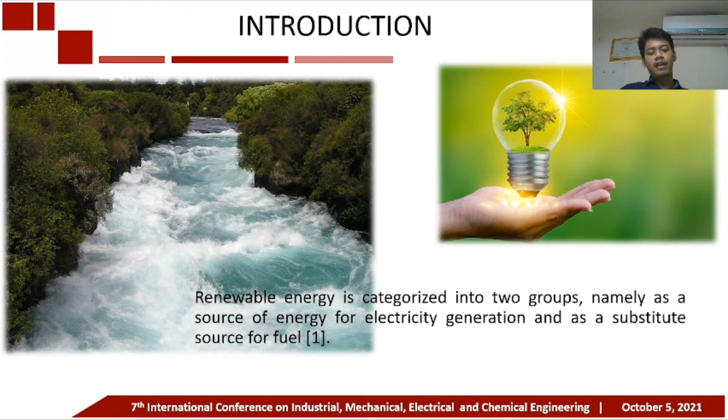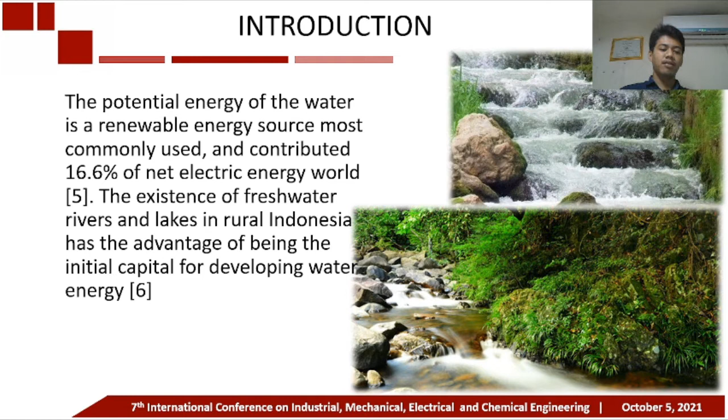Renewable energy is categorized into two groups, namely as a source of energy for electricity generation and a substitute source for fuel. The potential energy of water is the renewable energy source most commonly used and contributed 16.6% of net electric energy in the world. The existence of freshwater rivers and lakes in rural Indonesia has the advantage of being initial capital for developing water energy. One of the micro-hydro power plants is the gravitational water vortex power plant (GWVPP).

This type of turbine technology is a new turbine technology, which is expected to compete with conventional systems for low head and low flow applications. This turbine was first developed by Franz Zotlöterer in 2006.

The system produces a free surface flow which is created in an open space or basin with a hole located at the bottom of the basin so as to produce a vortex flow. The first installation was carried out by Zotlöterer, which produced 10 kilowatts of power in the Obergrafendorf River, Austria, in 2006.

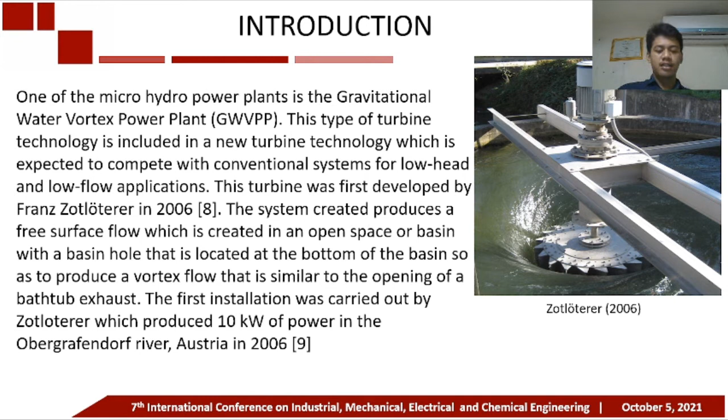Various studies have been conducted to determine the most optimal vortex turbine performance with design parameters such as number of blades, blade depth, radius of blade curvature, hub diameter, blade aspect ratio, and notch angle. In line with its development, the gravitational water vortex turbine (GWVT) has been widely applied in various countries as a source of electrical energy to remote areas.

GWVT works by absorbing the vortex power induced by gravity with a low head of 0.7 up to 3 meters. GWVT has the advantage of simple design, easy fabrication, installation does not interfere with the ecology of rivers or waterways, low maintenance, and is able to operate at low head and discharge.

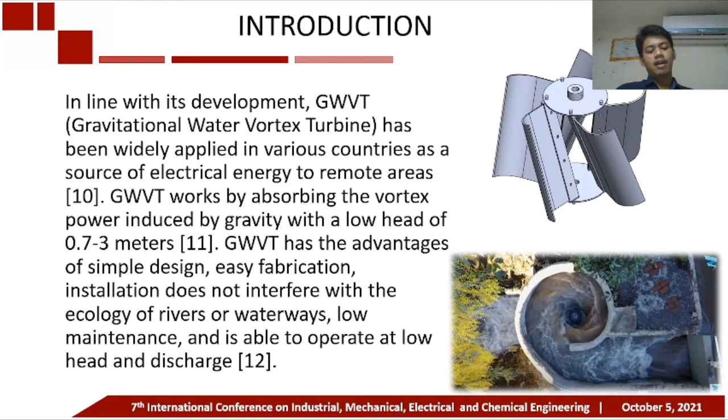Figure 1 shows an analysis of the tangential velocity profile in which water is flowed through an open channel to a vortex space which causes the water to form a strong vortex. The velocity near the vortex core is then used to rotate the runner. To measure the maximum power, the parameters of the vortex height and the flow rate must be measured. The vortex height HV is determined by measuring the height in the basin. The water flow rate is measured by measuring the time it takes to fill the volume of the reservoir.

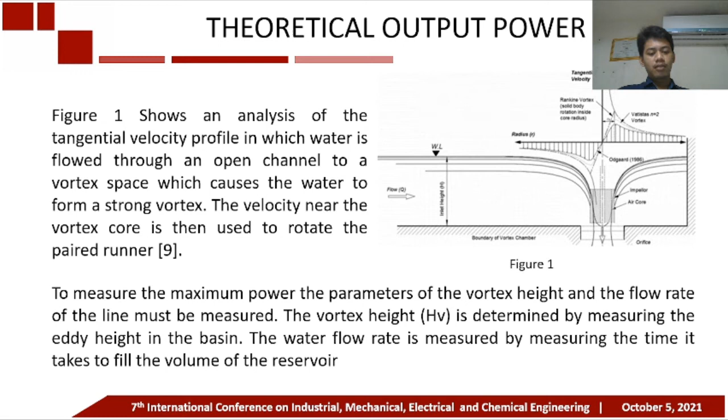Input power. The input power is measured based on two parameters, namely the vortex height and the water flow rate from the reservoir. The vortex height is measured using a measuring tape attached to the inner basin wall. The water flow rate is measured by accommodating the volume of water leaving the basin per unit time. Several previous studies also use the same method for measuring flow rates.

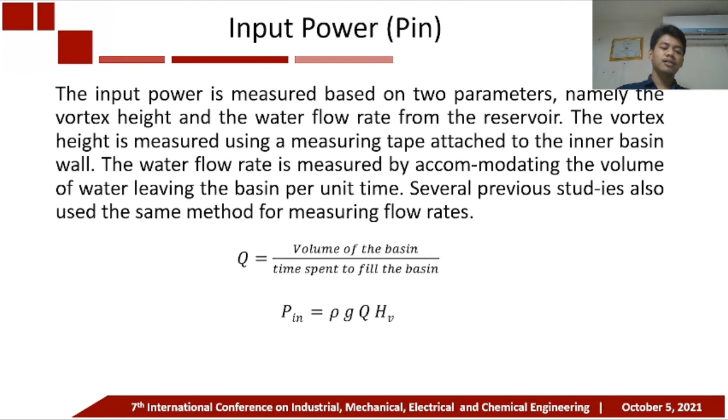Turbine power. In order to measure the turbine power by experiment, the torque value, T experiment, and the corresponding rotational speed, the angular velocity, omega experiment, of the shaft in radians per second must be calculated. To measure the torque, a load cell is used which is paired with the belt pulley system, and the output value recorded is the brake force multiplied by the radius of the pulley, which produces the brake torque value. The experimental mechanical efficiency can be seen in this equation.

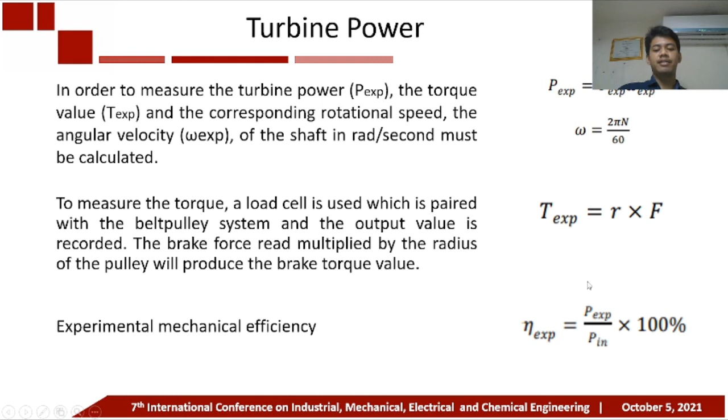Observation of the flow of water hitting the blades of the turbine showed a vortex circulating around the basin and centrifugally exiting through the basin. The blades of the turbine are affected by the centrifugal flow that occurs.

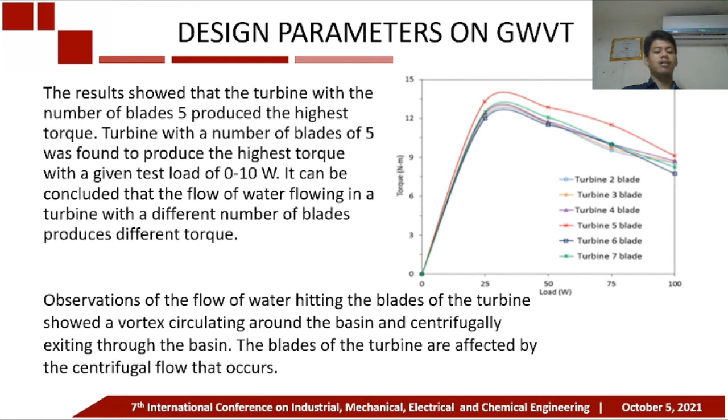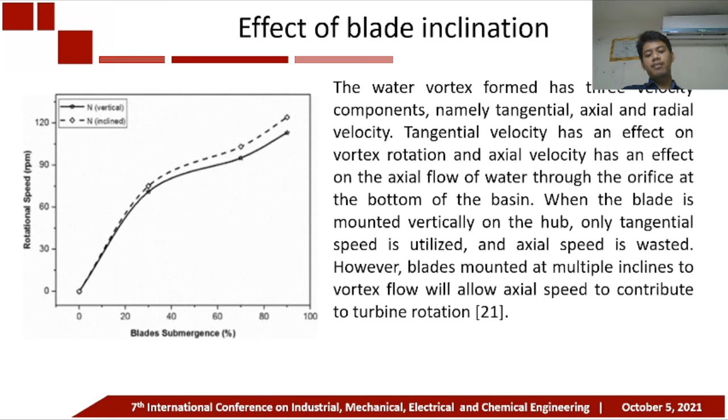Effect of blade inclination: the water vortex formed has three velocity components, namely tangential, axial, and radial velocity. Tangential velocity has an effect on vortex rotation, and axial velocity has an effect on the axial flow of water through the orifice at the bottom of the basin. When the blade is mounted vertically on the hub, only tangential speed is utilized and axial speed is wasted. However, blades mounted at an incline to the vortex flow will allow axial speed to contribute to the turbine rotation.

Effect of blade radius curvature: a water turbine gets power from water continuously hitting the blades of the turbine. The result showed that the blade with 120-degree blade curvature produced 39.15 watts of power with a power coefficient Cp of 0.23 and a tip speed ratio TSR of 1.075.

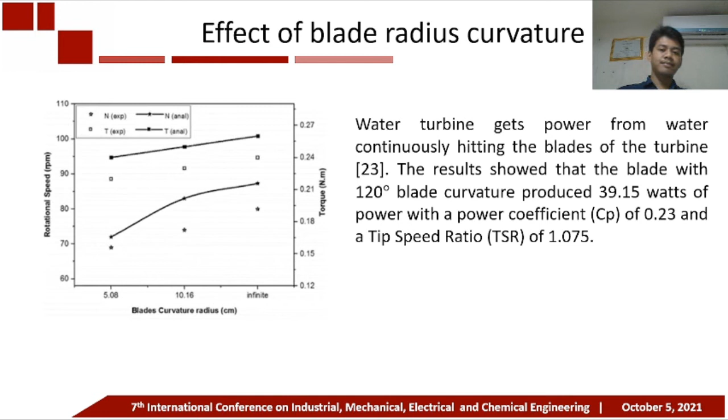A smaller hub diameter has a smaller effect on the vortex height. However, a hub diameter that is larger than the diameter of the vortex will disturb the shape of the water vortex, causing water to exit through the basin at a faster rate. A higher mechanical efficiency is obtained for a smaller hub diameter.

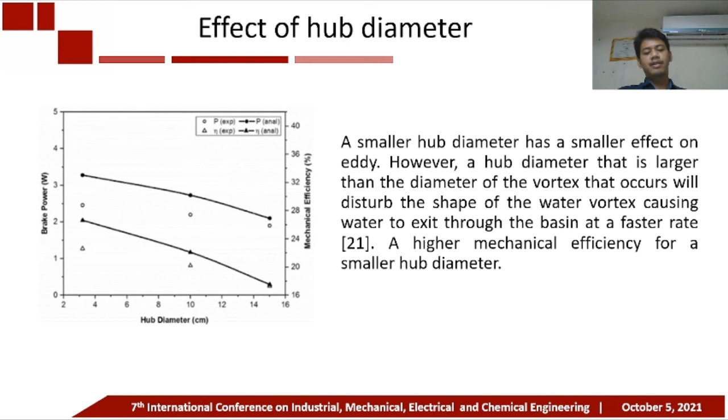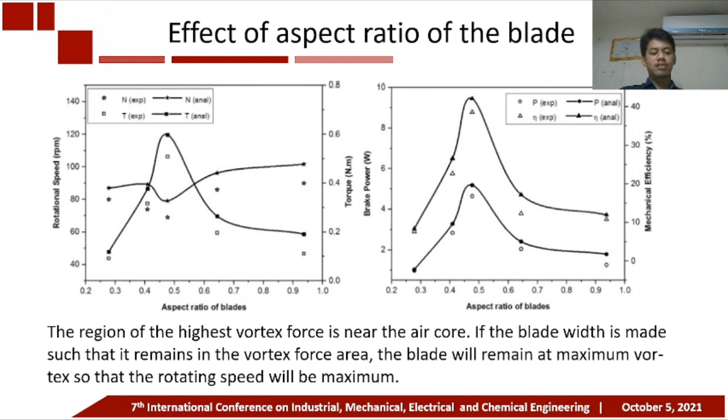Effect of aspect ratio of the blade: the region of the highest vortex force is near the air core. If the blade width is made such that it remains in the vortex force area, the blade will remain at maximum vortex so that the rotating speed will be maximum.

In conclusion, the gravitational water vortex turbine is a turbine technology that is suitable as an electrical energy source in remote areas that have adequate water resources. This turbine's advantage is its ability to work at a very low head and even without a head. The region of the highest vortex force is near the air core. If the blade width is made such that it remains in the vortex area, the blade will remain at maximum vortex so that the rotating speed will be maximum.